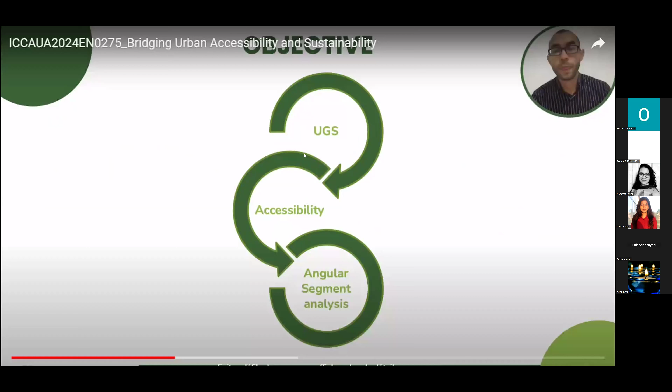Given the critical role of urban green spaces, our research seeks to investigate the accessibility of public green spaces in Mostaganem. We aim to assess the availability and characteristics of 12 distinct green spaces within the urban spatial network, utilizing the angular segment analysis method of space syntax theory for comprehensive analysis.

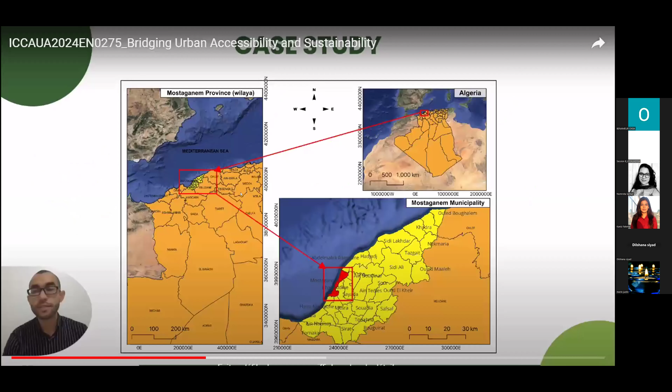Case study. Delving into our case study, we focus on the picturesque city of Mostaganem, situated on the northwestern Algerian coast, approximately 400 kilometers from the capital Algiers. This littoral touristic city offers a rich canvas for studying the spatial dynamics of urban green spaces.

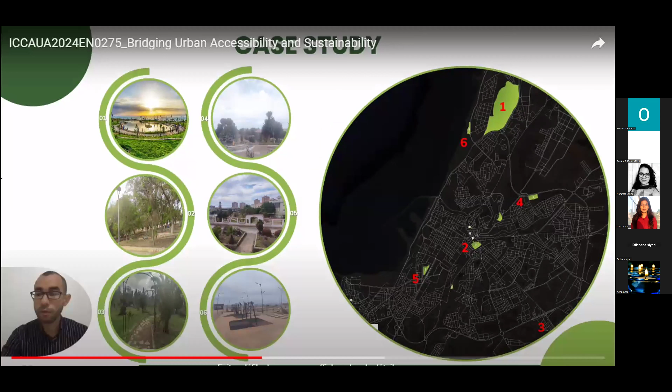The map continues with additional locations, including Al Arsa, Al Salam, 1st November, Salamandre, Boujma, and Barai.

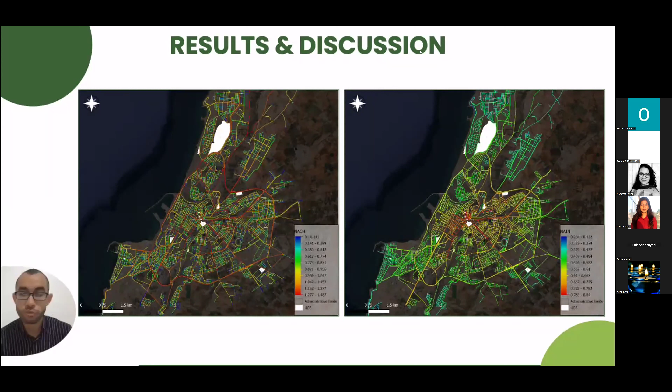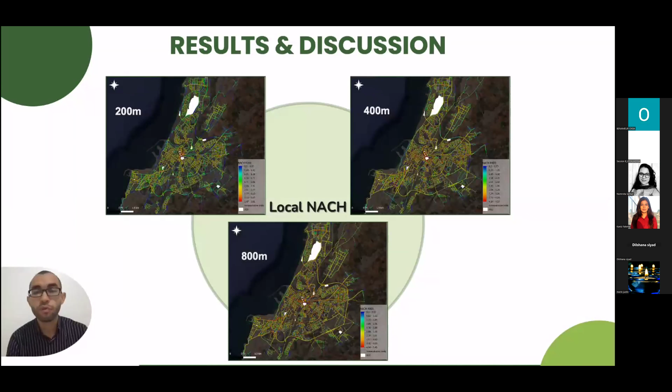Short local radii of 200 meters emphasize localized pathways and pedestrian flows, while longer radii, namely 400 meters and 800 meters, underscore major thoroughfares that facilitate movement across the urban landscape. Additionally, normalized angular integration elucidates varying degrees of connectivity and accessibility across the urban network, spanning from smaller hubs to broader neighborhood structures.

Our analysis illustrates varying levels of connectivity and integration, highlighting the disparities across the different scales of the urban environment, as illustrated by the global measures and the local syntactic measures.

Upon comparing global and local radii, particularly a 400-meter radius corresponding to a 5-minute walk, we observe that green spaces in the downtown area, such as Amir Abdel Qadir and Bujim'a, boast strong accessibility at all scales.

Conversely, spaces located on the periphery, such as Jannat Al-Arif, expose and exhibit lower accessibility. An exception is Salamander Square, located in a touristic and attractive area, which ranks highly in local syntactic measures.

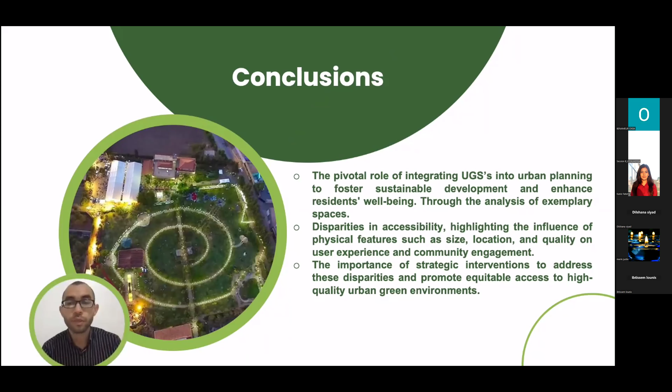we have identified disparities in accessibility, highlighting the influence of physical features such as size, location, and quality on user experience and community engagement. Our findings emphasize the importance of strategic interventions to address these disparities and promote equitable access to high quality urban green environments.

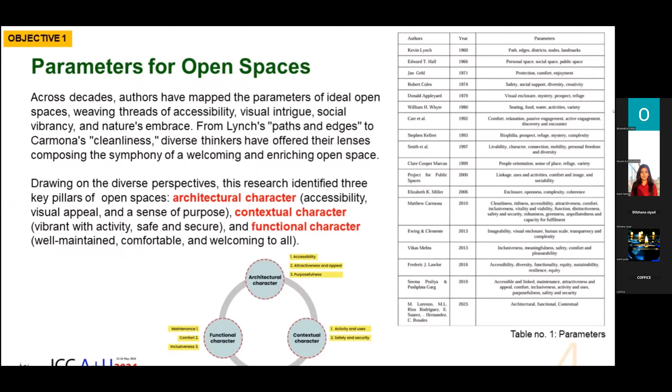The second objective of the research is to analyze the policy frameworks in Kerala. The National Urban Development Policy has mentioned only the importance of open spaces. The Town and Country Planning Act has not mentioned the quality of open spaces that have to be maintained.

The Environmental Protection Act has focused only on the eco-sensitive zones and its protection. The Forest Conservation Act has mentioned about the conservation of protected forest, and the National Heritage Protection Act has focused only on open spaces surrounding the archaeological sites.

At national level, the urban and regional development plan formulation and implementation guidelines have been referred, and they have only focused on open areas to be allocated per person. The assessing parameters such as accessibility, maintenance, inclusivity, and safety are all merely touched upon peripherally.

These were the national rules, policies, and acts that govern open spaces in India.

Now within Kerala, the master plan analysis has been done for the metropolitan cities like Kochi, Kozhikode, Thrissur, Trivandrum, and Kannur. The master plans are trying to achieve the areas mentioned in the URDPFI guidelines per person, but none of the cities have achieved the quality open spaces mentioned in the URDPFI guidelines.

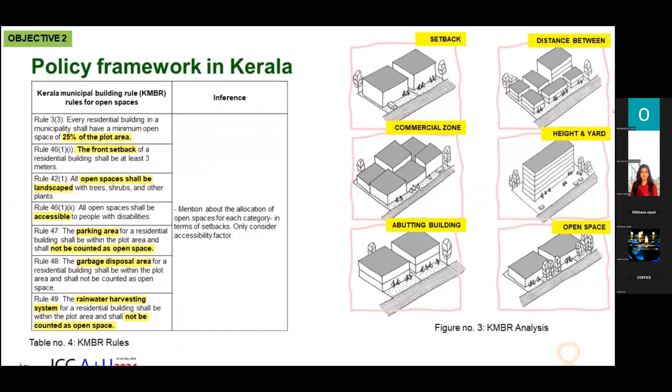The Kerala Municipal Building Rule is also analysed. It has mentioned about the allocation of open spaces for each category in terms of setbacks, and only considered the factor of accessibility.

Looking into the current scenario from the above analysis, it is observed that the acts and policies mentioned only about the importance of open spaces, while the URDPFI guidelines mentioned about the open space requirement per person and few parameters like inclusivity, safety, maintenance, and accessibility. The master plan areas as per URDPFI guidelines are not met, though quantitative distribution of open spaces is based on norms and standards.

These do not address the qualitative and management aspects. The quantitative distribution does not look into the larger ecosystems.

Therefore, the issues existing are the need for open spaces, that is quantity; the regulation of open spaces, that is quality; and maintenance issues.

For achieving quantity, open spaces should be seen as part of a whole system and develop a comprehensive structure plan with all open spaces. For achieving quality, understanding literature to derive parameters and formulate guidelines, and to develop context-specific guidelines for existing and new developments.

For existing and new developments, maintenance can be achieved by developing and maintaining both existing and proposed open spaces.

Methodology is categorized into three levels. At macro level, quantity is to be obtained by looking into the overall landscape plan. At meso level, quantity has to be obtained within the sector. And at micro level, quality of open spaces has to be maintained.

Now looking into the urban issues and concerns in Kerala, the majority of the urban centers are located along the coastal area. We have urban areas and rural areas in Kerala, and the main challenges are observed in urban areas, that is in large towns. These areas have inadequate open spaces, and the open spaces that do exist are of poor quality.

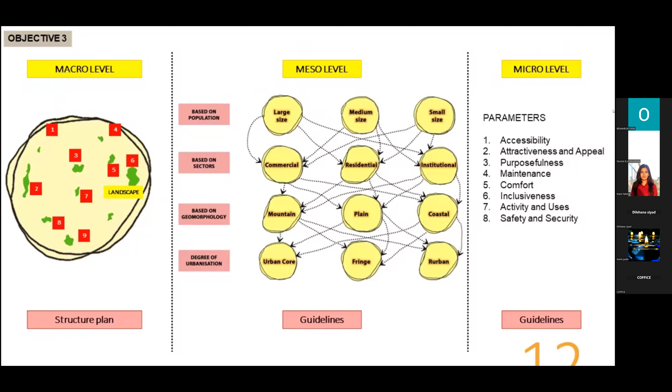Now moving to objective 4, that is to analyze the research based on a case example. Here, Kochi city is being selected for the study. The area has high population density and is facing several environmental issues.

To develop a macro level structure plan, several maps have been layered to understand the vulnerable areas. These maps include the topographic map, urbanization map, development pressure map, catchment area map, flood prone or disaster mapping, existing and conserved open spaces mapping, and watershed analysis.

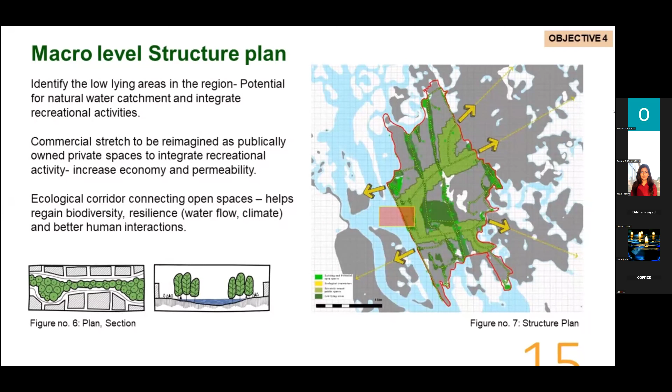Based on the study, a macro level structure plan has been formed. The low-lying areas are identified for natural water catchment and integrating recreational activities. The commercial stretch can integrate recreational activity, which thereby increases economy and permeability of land. Ecological corridors connecting open spaces are also proposed, which helps regain biodiversity, resilience, and better human interactions.

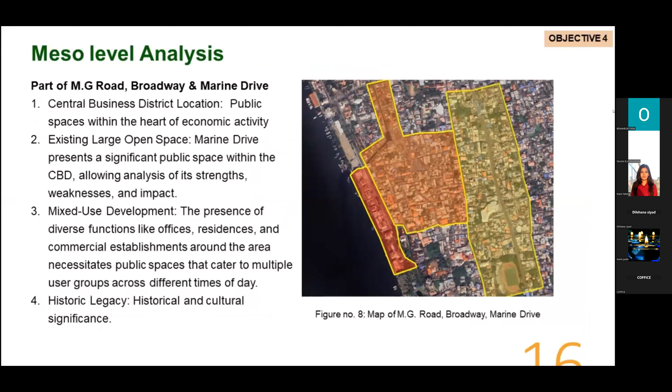For meso-level analysis, the CBD area is being selected for the study. This includes parts of MG Road, Broadway, and Marine Drive. These areas represent the heart of economic activities of Kochi city. They contain large open spaces, mixed-use development, and possess historic legacy. These are the character of the identified precinct.

The precinct is bordered by the Arabian Sea to the west and the Metro Corridor to the east. Marine Drive to the west is part of a planned development and consists of mixed-use buildings.

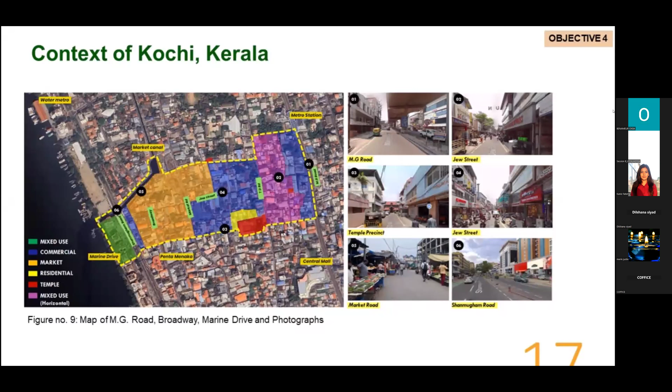Broadway is a traditional market area and exhibits traditional typologies of buildings. The MG Road towards the east of the precinct represents high street typologies in Kerala with branded commerce. There is lack of open spaces within the Broadway market and the MG Road stretch. Majority of the people use the open space along the sea edge in Marine Drive.

Meso-level strategies were formulated to obtain open spaces within these three areas. These are the strategies proposed to provide open spaces in these three areas of the precinct.

In Marine Drive area, breaking of plinth to connect the open spaces along the seaside with the major road. The market canal and its edge and the street itself can be treated as open spaces in case of Broadway. And at MG Road, smaller footprint buildings can be combined together to form larger footprint buildings to form open spaces in between the buildings and at the front yard.

All these placemaking strategies will help to achieve adequate open spaces that are required within the sector.

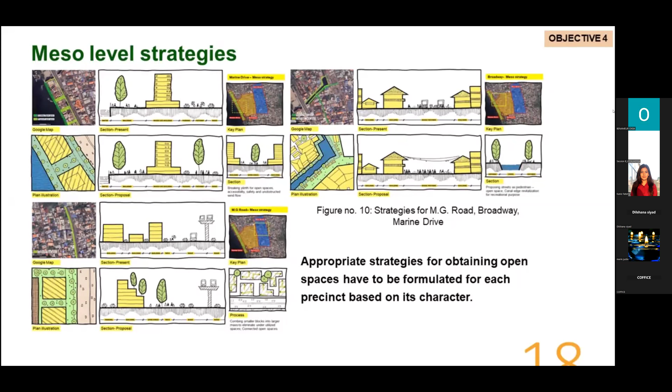The guidelines proposed are connected pedestrian paths, appropriate ramps and stairs with proper design and material, building frontage which should be accessible from pedestrian street, incorporating cycle tracks and racks, open spaces at 5 to 10 minutes of walk, signage to be provided at the same level with same materials and fonts, open spaces to be well landscaped, interactive public art and water features.

Similar materials for pavement of walkways which should be aligned with the road, front setbacks to be 7 meter to 11 meter to provide open spaces, promoting common boundary, provision of public spaces within private development, 25% of built footprint should be designated as public spaces, car parking, loading or unloading should be planned away from the pedestrian or open spaces.

Incentives for providing terrace gardens for occupied areas on ground, open spaces which should be publicly accessible at all times, 1 seat per 20 square meter of public spaces, providing through block links for larger blocks from pedestrian streets. Secondary streets or through links should be 4 meter to 7 meter in width and 10 meter in height.

Improving permeability of the street using appropriate material, providing high degree of visual and physical porosity, well-designed night lighting scheme, ground floor which should be provided with active functions, types of plants on streets and roof should be based on views and wind movement, covered public spaces should be of high volume and should be in proportion with its size, providing services like drinking water, toilets, Wi-Fi, phone charging, etc.

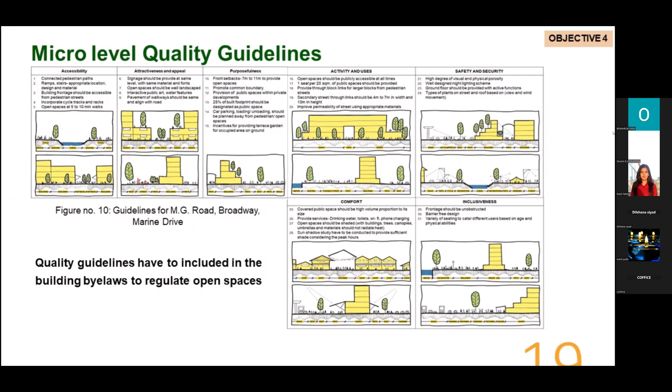The open spaces should be shaded with buildings, trees, canopies, umbrellas, and materials should not radiate heat. Sun shadow study has to be conducted to provide sufficient shade considering the peak hours. Frontage should be unobstructed, barrier-free design, variety of seating to cater to different users based on age and physical abilities.

Sufficient open spaces play a pivotal role in enhancing the well-being of both individuals and the environment. An examination of existing policies exposes a shortfall in open spaces coupled with subpar quality in those that currently exist. Additionally, there is an apparent absence of a thorough analysis concerning the requisite quantity of open spaces.

The framework established in this research endeavors to rectify this by addressing both the qualitative and quantitative dimensions of open spaces. It is important to note that the paper specifically concentrates on defining the open spaces within the commercial typology of Kerala. However, the framework can serve as a foundation for defining open spaces across various typologies within the region.

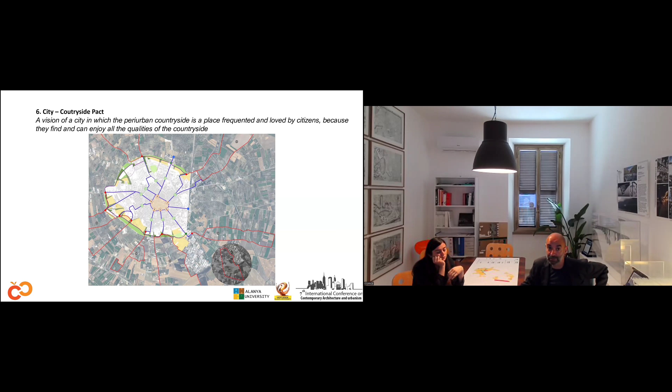The seventh is the active involvement of the citizen, which means participation. Because there is no project, no way to make people happy inside their city, if the citizen is not involved in the project. It's a vision of a city in which inhabitants, entrepreneurs, and technicians can find spaces to make their voice heard and actively participate in the care of the city and the choice of transformation of the urban landscape.

These were the 7 points of the city of good dwelling. Where are we going to apply it?

Everywhere. For example, we are presenting a project in Velletri, a city next to Rome, in the Castelli Romani area, in which the action of this historical center was necessary to remedy the situation of neglect and degradation. It may also be an appropriate preventive policy of intervention distributed over time, to avoid the same dangers of abandonment and degradation in the historical center's vital areas.

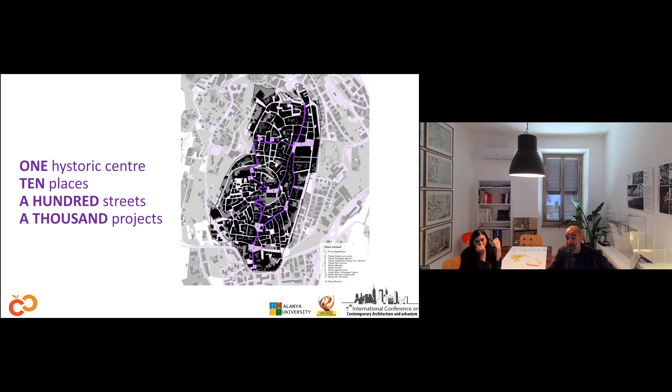The most important thing was that this center was divided into different little centers, because there were some boundaries made by the orographic situation of the terrain. So we decided to make one historic center divided into 10 places linked together, and 100 streets with thousands of little projects, because we are not speaking about a huge problem with huge projects.

We are speaking about a huge problem, which means that the historical center and the new urban modern city have a lot of projects that don't work. But to make it work, we don't need huge projects. We must make 1,000 little projects across these huge cities.

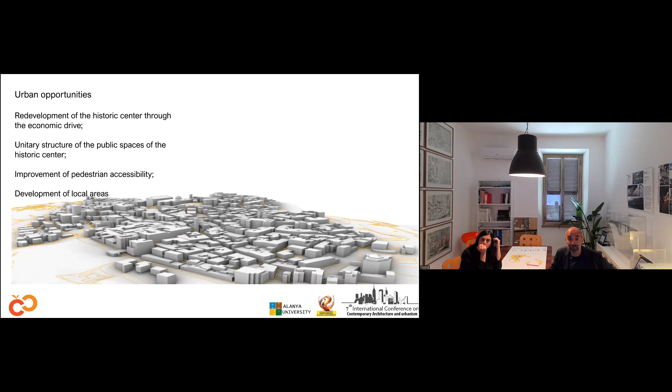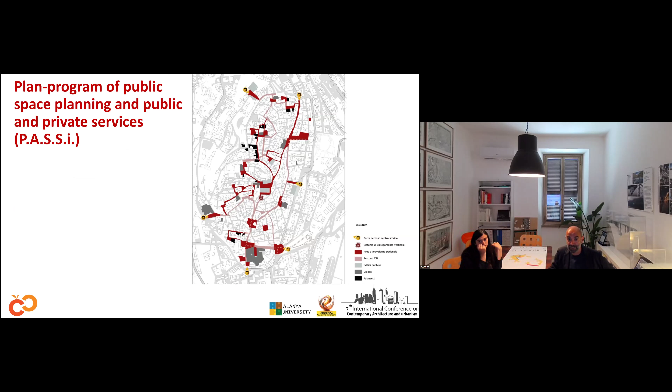The urban opportunity of this rehabilitation is to link all the squares and historical monuments with the principal streets. To do this, the first important thing is to avoid car circulation inside the main streets, which means transforming this historical center into a pedestrian walkway.

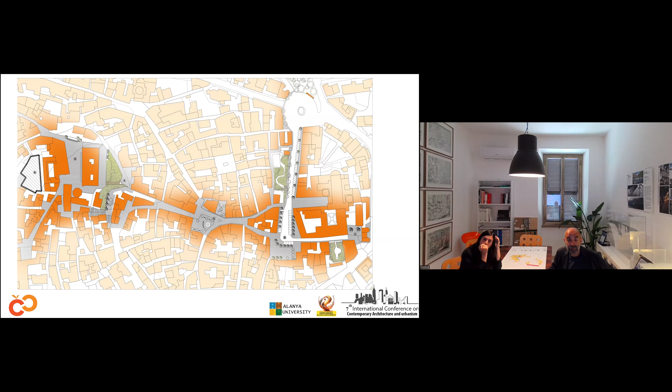To achieve this, the city administration intends to promote and consolidate a methodology that links the level of planning with that of the project, understood as urban design, for which specific intervention guidelines are drawn up for each identified area. In this way, thanks also to the availability of PNRR funds and specific programs of public and private urban regeneration, it will be possible to concretely realize a new historical center tailored to its inhabitants.

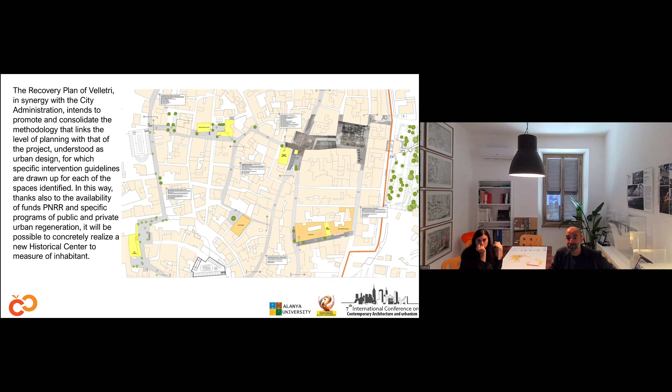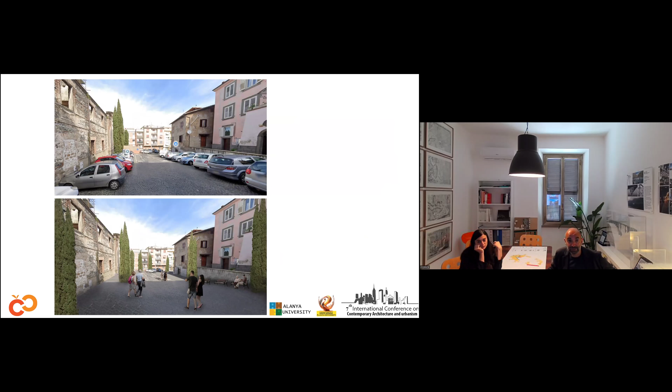We've made some different scenarios. You can see how incredible the change is just by erasing all the car parking in this place, and planting some trees and benches, letting people walk without cars, which were destroying the urban quality of this historical center. All these scenarios were made with the same aim: to transform the places where now cars live, into places where people live.

The inhabitants will live inside it. No cars, more people. The city of good dwelling means feeling belonging to the places of that city, means establishing relation with those places. We would like to thank you, because we were recognized with the second prize of the International Aesthetic Design Competition, and we are very delighted by this prize.

We were signaled by the second prize of the International Aesthetic Design Competition, and we are very delighted by this prize. We would like to show, in really few time, in 1 minute, the project by this video.

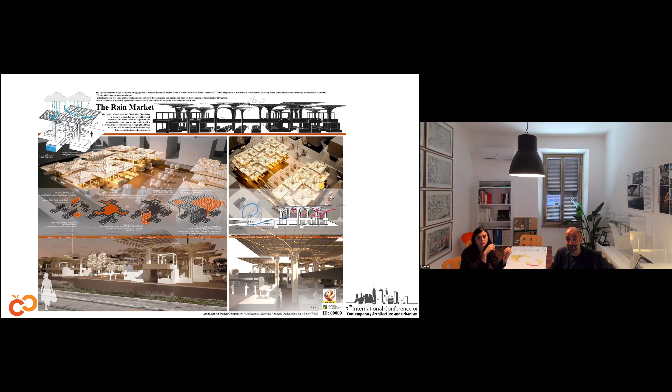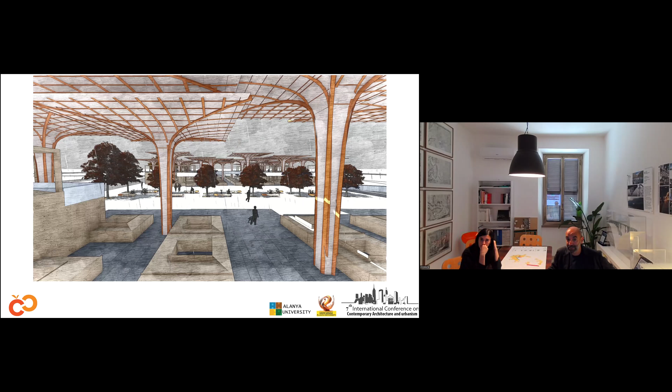In this project, we have tried to use all the 7 principles of the theory of the good dwelling, using public spaces, a square that doesn't exist yet, inside a common market, because this is a public market.

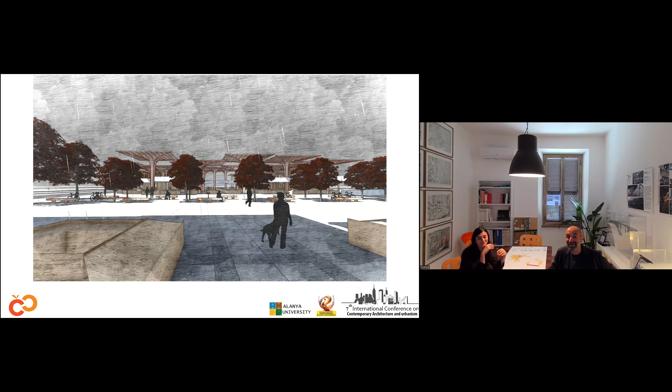It doesn't exist yet; we are still working on it. But it's a market, an open market to the city, in which people and marketers can work in contact with the city itself. It's the city itself which enters inside the market, and the market which opens to the city.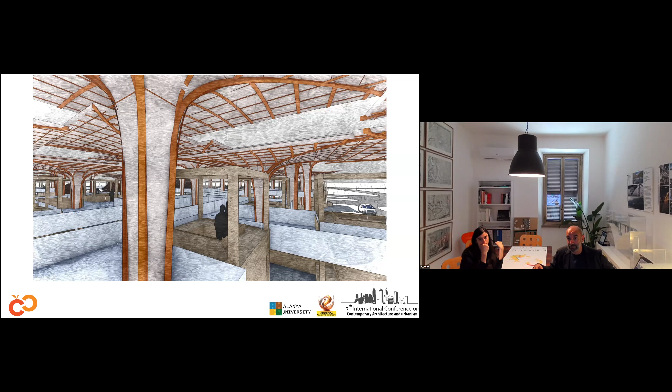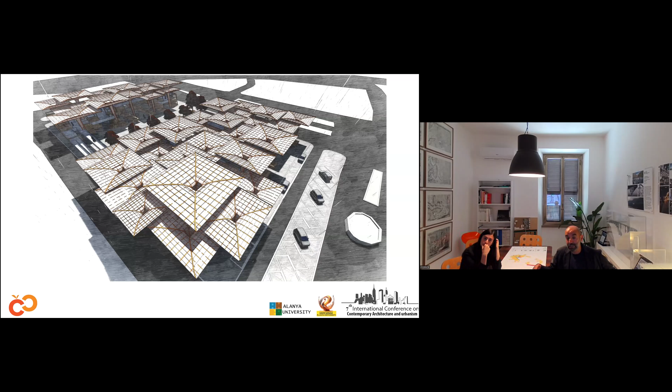The concept of the rain market is to develop the problem of the biocompatibility of this construction, which means collecting all the rainfall and water that comes during the winter period, and reusing it to wash the market during the summer period.

I think that we finished, and I hope that we were inside the 10 minutes. That's all. We are very thankful. We are very delighted to be with you.

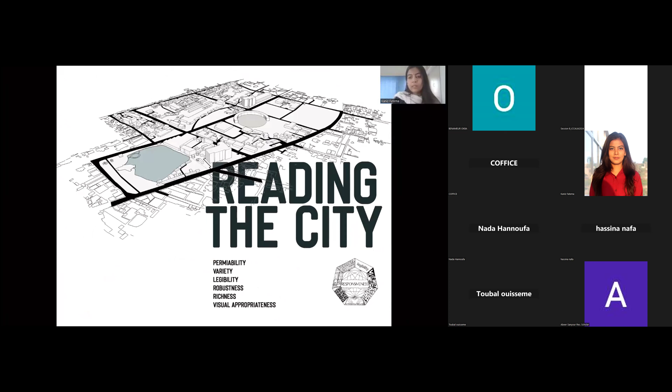Our study intends to assess and evaluate those regions in terms of their urban responsiveness, taking into account factors like permeability, variety, legibility, robustness, richness, and visual appropriateness. Our intention is to aid the future sustainable urban development of those areas.

First comes the concept of urban voids - the absence of appropriate placemaking that is restraining our site from being responsive. They don't improve the surroundings or the user's experience. Types of urban voids defined in a city could be planning void, geographical void, and functional void.

As we are going to evaluate our site per the terms of the book Responsive Environments, here goes the first one: permeability, which involves where people can go. Next is variety, which involves the range of uses available to the users. Legibility is defined by how easily people can comprehend the opportunities of a particular space.

Next is robustness, which means people can use a given place for different purposes - the mixed-use functionality it offers. Non-visual richness denotes the selection of sensory experiences like smell, hearing, and tactility. Visual appropriateness depicts the intricate appearance of a place, how it appears visually.

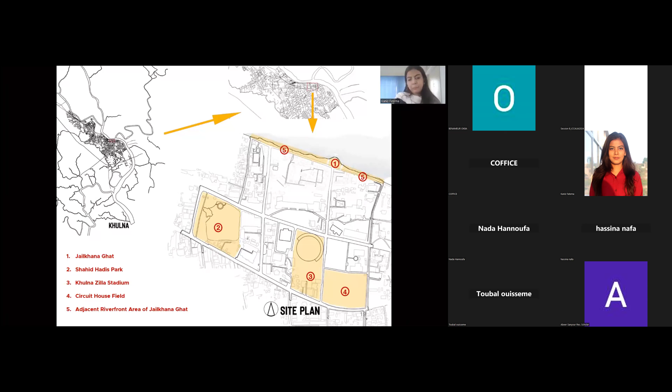From the pilot survey and non-participant observation, we obtained an outline of some particular public zones that we took into consideration. The zones are respectively marked: 1, Jailkhana Ghat; 2, Shahid Hadis Park; 3, Khulna Zilla Stadium; 4, Circuit House Field; 5, adjacent riverfront area of Jailkhana Ghat. As per the site, the identified zones fall into these categories.

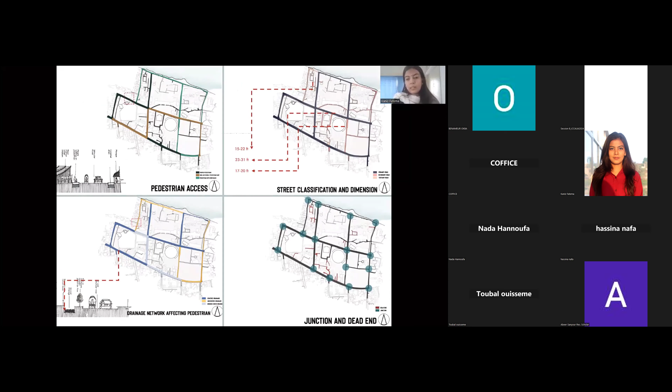Survey data from continuous observation led us to observational mapping on the permeability of this site. Most of the pedestrian ways are not designed or maintained properly. Unauthorized vendors on those pedestrian ways hamper the pedestrian flow as well. A large number of drains are uncovered or damaged. Besides, the responses of the users show a level of variation in using those different zones.

In this slide, the most familiar case of segregation is found in the land uses. In our site, the government zone segregates a huge portion of the land use pattern. An indicatory range of activity density is mostly noticed in the magnet spaces of this site, Hadis Park, Circuit House Field, and the Jailkhana Ghat area.

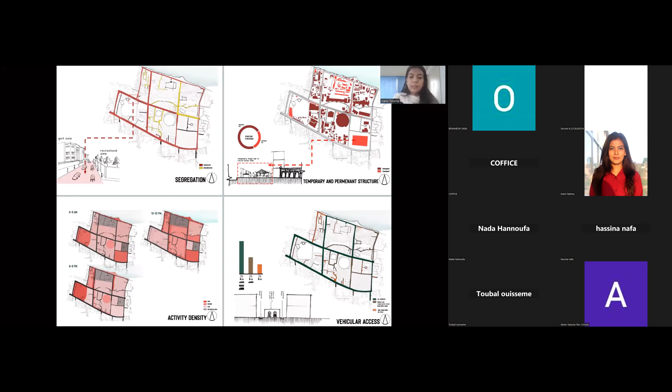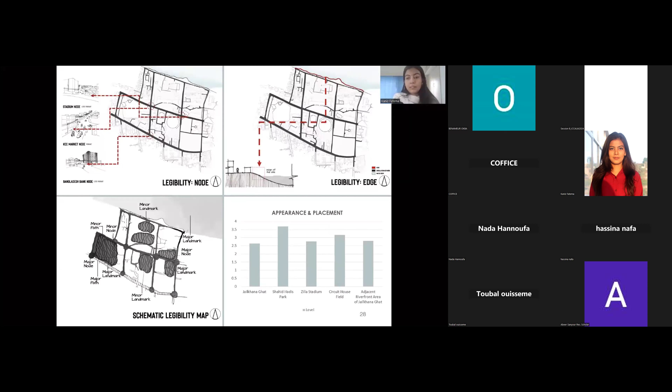This site holds a certain number of landmarks, major and minor nodes, and the northern border of Khulna, that is the Rupsha Riverfront, acts as the edge of this site. This site contains a particular amount of vibrant public spaces: Shahid Hadis Park, Khulna Zilla Stadium, Khulna Circuit House Field, etc. Although the vibrancy varies time to time at different points.

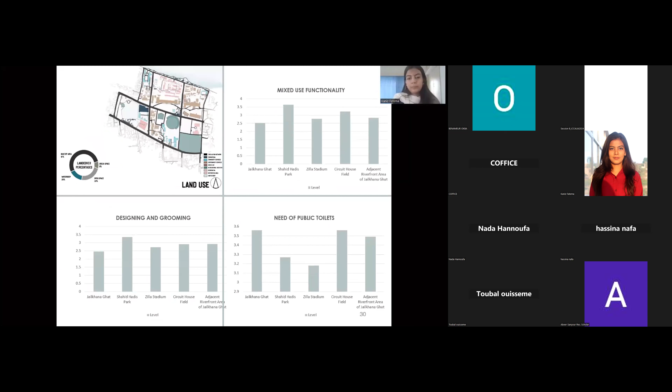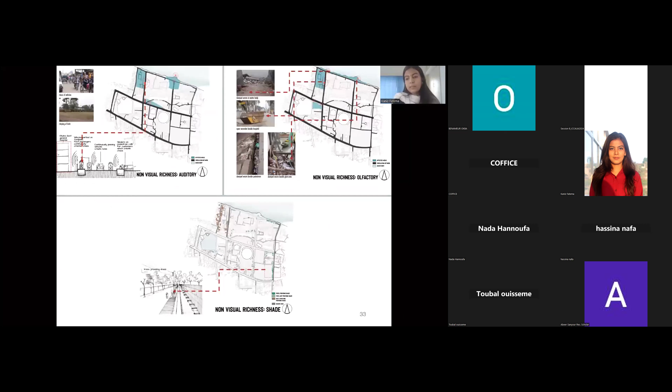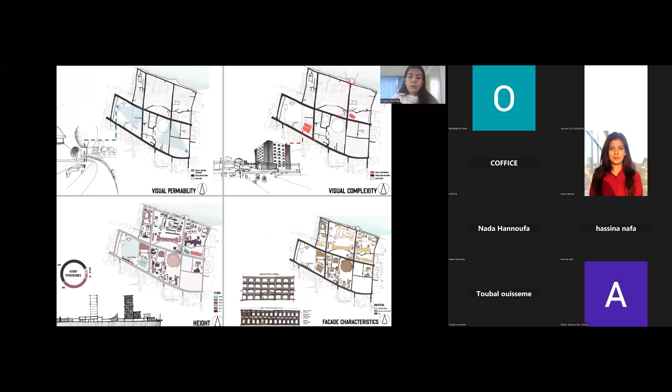Uncovered drains and poorly maintained waste dumps create odors and inconveniences in the marked areas. In this site, different points of nodes and the inaccessible and stagnant river could create visual complexity for human observation, which obstructs people's perception, creating visual complexity.

The mean value is the sum of all the values divided by the number of values. Here the questions led the respondents to rate their experiences from using a particular urban space as per the site of the study. The higher number is 5, which depicts a very satisfactory experience, while 1 denotes a very unsatisfactory experience by the user.

All the observational data, mappings, and survey information acquired and analyzed in this study might put a step forward to future research and the sustainable urban design of Khulna city. Utilizing the natural asset of the river to boost the area's attractiveness by offering a constant center of activity, improving downtown business, and providing opportunities for local stakeholders. The ultimate objective would be a riverside that is accessible and enjoyable simultaneously.

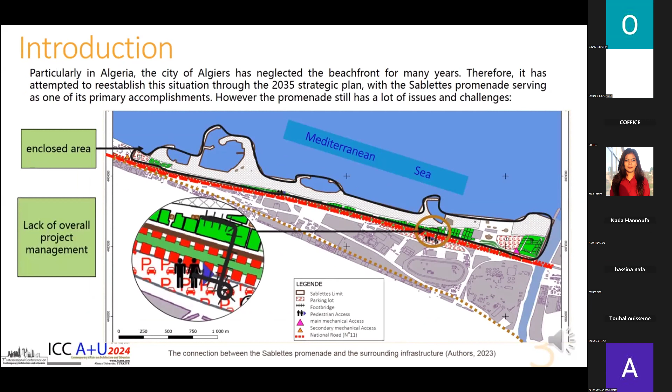This work aims to improve the quality of this urban coastal promenade by evaluating user satisfaction according to the three dimensions of sustainable development, helping authorities to improve coastal public spaces by identifying their strengths and failings, and becoming aware of the aspects that make them more effective from a sustainability perspective.

We pass now to the case study presentation. The development of the Algiers Bay includes structural projects linked with a wide promenade extending 50 km.

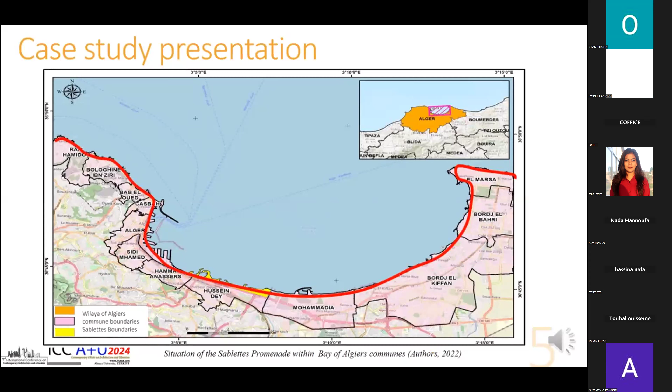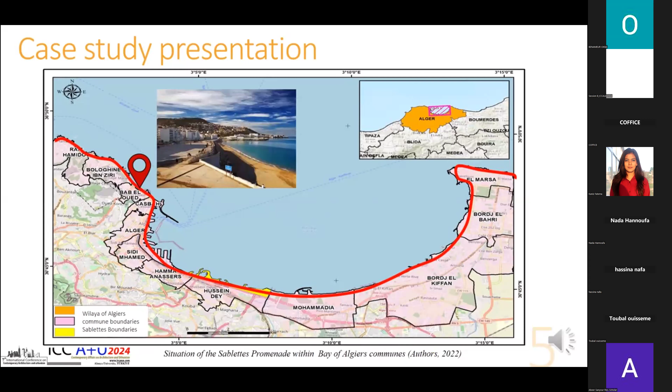Three sections have been completed. Section 1, the Bab El Oued Promenade in the west, measuring 220 meters. Section 2, the Bordj El Kiffan Promenade in the east, measuring 950 meters.

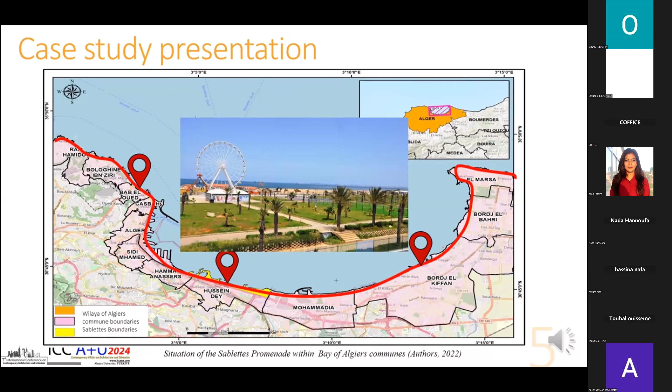Section 3: the Sablettes Promenade in the center of Algiers Bay, measuring 4.5 km, which was developed after years of neglect. The methodology of this research was mainly based on the post-occupancy evaluation method, which consists of measuring the degree of user satisfaction using a self-administered questionnaire, online and in the field, composed of 3 sections.

The first section was designed to collect demographic data: gender, age, level of education, profession, place of residence, etc. The questions used in this section are single and multiple choice.

The second section was designed to measure user satisfaction with the quality of the Sablettes Promenade using scaled questions of Likert with 5 points. The important components that affect quality were composed of 10 measures: economy of use, management, attractiveness, safety and security, mobility, accessibility, urban ambiances, urban composition, arrangements, and environmental quality.

The last section included questions about the most common annoyances for users in the promenade.

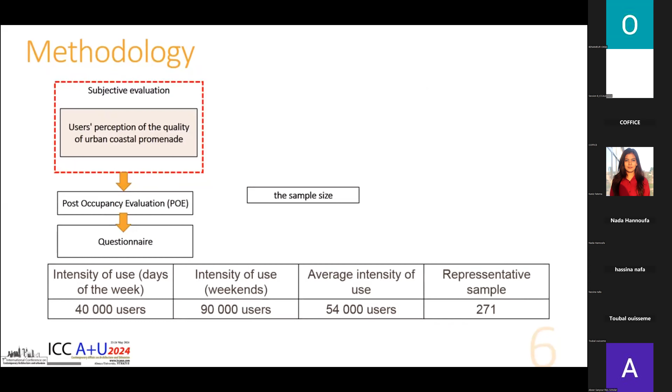To find the sample size, we need to determine the intensity of use. We have 40,000 users on weekdays and 90,000 users over the weekend, so the average intensity of use is 54,000 users. We obtained a representative sample of 271 users, calculated with the equation of Steven K. Thompson, using the following formula.

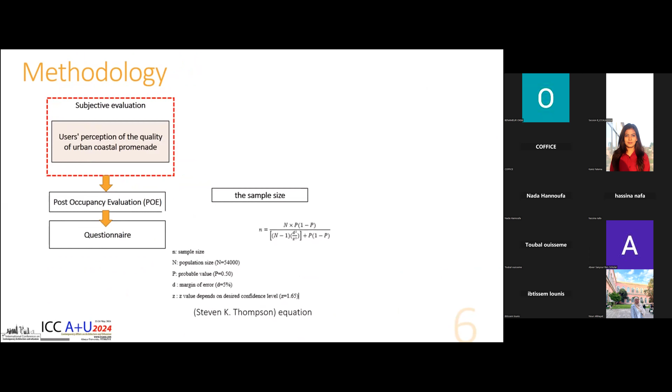Passing now to the results and discussion.

In terms of frequency of use, the majority of users frequent the promenade occasionally and mainly practice the activity of strolling. The most common mode of transport to reach the promenade is the car. Finally, the most disturbing factor for users of the promenade is the noise of other people.

First, the analysis results for attractiveness and environmental quality indicate that users are not satisfied because of the absence of information and communication technologies, the lack of recreation areas and certain services needed in the promenade, and the missing protection against wind, rain and sun.